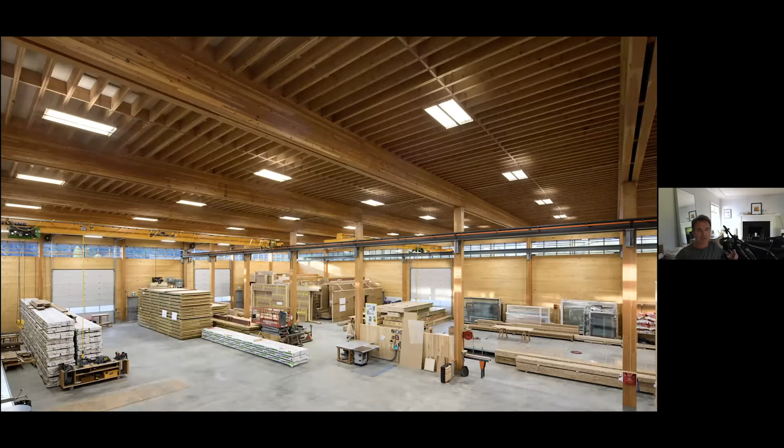So this is a good example of it. And then there's an office part at the front here and some work areas that were built to Passive House standard. What is interesting about this is, although we finished this building years ago, it is actually one of the suppliers for the exterior wall assemblies on PH1.

So you can get an idea, I don't know if you can see the mouse or not, but there's a series of insulated panels that they build here.

What's also interesting in the factory is that we're just doing an expansion of this now, so this needs to be updated, the photos. They've blown out this wall in the back and they've built another 18,000 square feet. So they're producing this at a fast and ferocious pace at the moment, can't seem to keep up.

Which is a nice kind of development in the sense that where they got their background in BC Passive House, I'm sure you've heard and talked about Matteo before, but it was coming out of the Winter Olympics with the Austria House being donated and then being assembled here. And then Matteo and his group got together and said, well, shouldn't we be doing this? So this is where the factory comes from.

And it's located in Pemberton, which is quite a beautiful thing. So we can talk about that one. But what was interesting is around the same time, we got a phone call from Christy and Tycho, I believe, who are here somewhere on the call. You can wave, and started talking about doing a commercial Passive House building in the city.

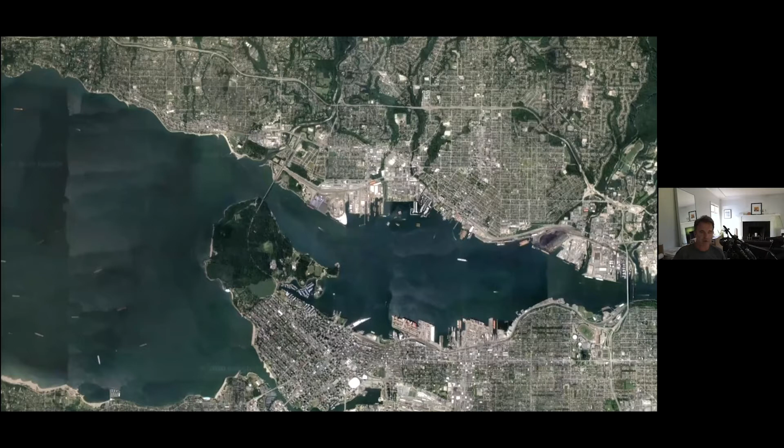So we all know where we are here. We're in North Vancouver, right down here at the end of Lonsdale. So the actual site address is 1 Lonsdale in Carrie Cates, right in front of the new Polygon Art Gallery. The art gallery wasn't built at the time that we started this. There's an existing restaurant, an Italian restaurant here, which is going to come back on the ground floor.

And so we were very intrigued with the idea of trying to do a passive mass timber project in a zero lot line urban environment. I had to write down everything that we were challenged with because we knew it was going to be hard, but I don't think we knew what we were getting into.

So it's Passive House certified commercial with a full Italian restaurant in it, meaning it's not induction, they're actually using gas. So there's lots of questions about that with Andrew and working with the Institute to find a solution for that. It's a challenging urban infill site, zero lot line on the back north wall.

We were going to prefab the building right from the beginning. We had to come up with 3 mass timber alternate solutions to get the project through code. One being the ground floor being an assembly space, as the code was at the time, it had to be non-combustible construction. Then the partition of the party wall between the 2 properties, zero lot line, we were going to do it out of mass timber.

Which Joe will show you some of the miracle of it actually working, because to be honest, as we were going through the design, nobody really knew how to do it. So there was an insulated mass timber wall that had to be prefabbed and dropped in. And then the code was also wanting that wall to be non-combustible construction, so we had to go through that whole process as well.

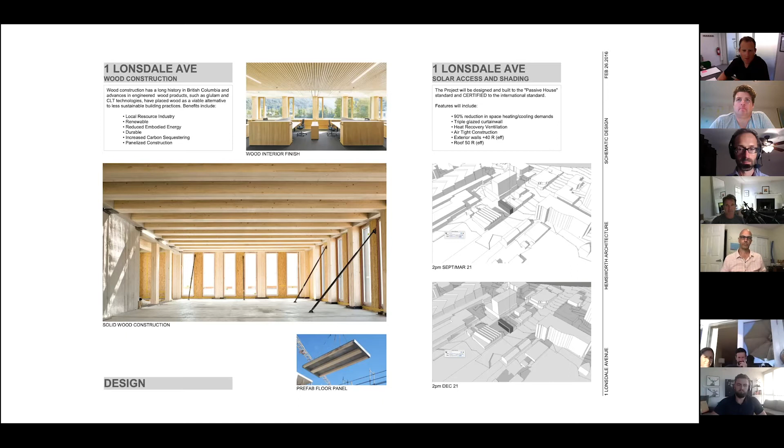And again, we were looking at prefab systems from the beginning.

Early on, we were interested in the massing change between what we thought would be the new Polygon and how this street became a more important part of the city - instead of being the low level it was, it's all going to be built up. So we did some preliminary massings. You can see early on we weren't sure about the height of the building - we were going to try to sneak another floor into it. This whole project was a balance between ambition and the realities of getting it through the city.

Passive House is part of that, as is the mass timber, but they were almost like the known knowns or known unknowns, whereas we got into some development issues - not with the city necessarily, but just inevitably for doing a high profile site like this that you're going to have to deal with.

We were looking at using something similar to the Passive House walls developed by BC Passive House, where they're building their walls with OSB on the inside, which is taped, blown insulation, and then the Agepan on the outside, with an interior wall on the inside which has been used for most of their servicing.

So the building then settled into the idea that we didn't want to go into another rezoning. We were stuck with roughly 2.6 FSR, 93% site coverage, and a maximum height of 11.9 meters. So we had to fit everything within that.

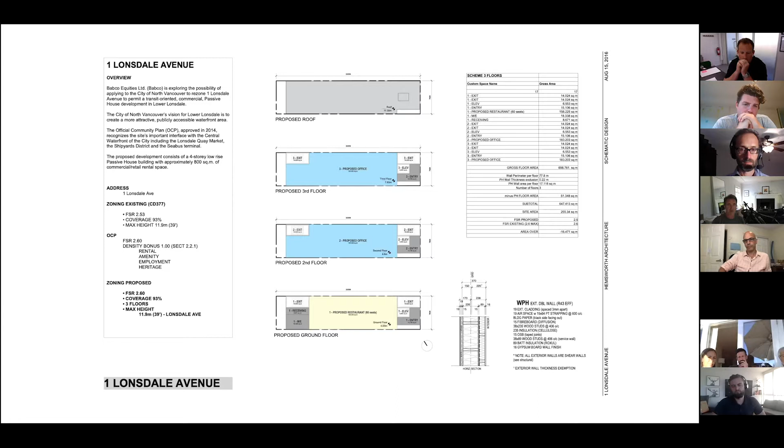One of the things we were clear about at the beginning was that we knew there would be these peekaboo views and throughout towards the city, depending on where you were in the building. We try to take advantage of that.

So then we started kind of going back and forth. One problem with having a lot of time to deal with a project is you have a lot of time to change your mind and make decisions and go back and forth. Over the years, we started this one probably at least 5 years ago.

I think it was to look at a palette that we could connect with more, and that the client would also feel comfortable with. So we started looking at using a kind of glazed brick as something heavier and more grounded, also playing off the lightness and the floating volume of the polygon across the street.

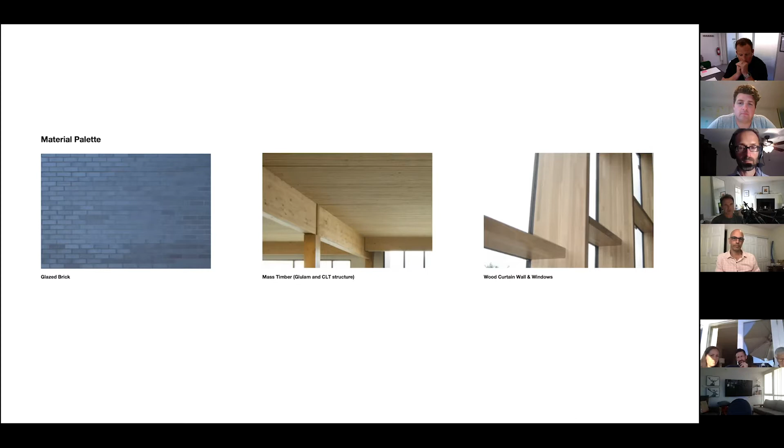So we wanted to do that, wanted to play off the ideas of an existing warehouse, that kind of warehouse construction along the waterfront. So we want to expose the glulam and the CLT, and ground it in this kind of almost existing building, but with a little bit more brains to it as far as its systems, and a little bit of interpretation architecturally.

So there is still work going on with the city as it relates to the edge condition here. Originally the road was much wider, so now we're looking at bringing the road across, which is helping us with the floodplain. There's going to be restrictions, hopefully, about cars or buses along Carrie Cates, where it becomes more of this pedestrian mews.

We set back the entry here, an elevator as you come in to split the occupancies from the 2 offices above and the restaurant below, and then just 2 exits dumbbelled on either end, but a very tight site and right up against an existing building, which you'll see in some of the videos.

So again, on the ground floor, we have this lobby space, shared entry, the restaurant itself all facing out towards this public space. It's not shown here, but the restaurant's kitchen and bar are actually back up against the wall, so everything is kind of falling out into Carrie Cates. And then basically just the floors are mimicked above.

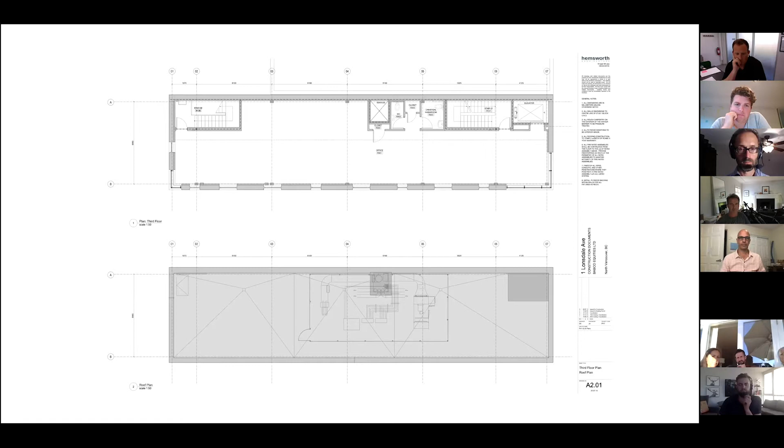The 25-foot site width is a challenge on a lot of different fronts, but we tried to look at different options to break these up into individual offices that could be rented. Right now it's probably going to be per floor, just based on trying to get your circulation levels down, and then mimicked on the same floor, on the third floor, which would be a great place for an apartment if you could pull it off.

So then what we're looking at here is basically our building sections. What we've done is an insulated slab. What you'll also notice, as I mentioned, there's no parking underneath the building, which is a whole story unto itself to get that approved.

It's a glulam frame structure with CLT floors and roof, and then all the wall panels on the 3 open sides were coming from the factory in Pemberton. The glazing, as all accounts, is coming from Austria I believe, and would have been installed as the panels were going, before the panels were installed, but I believe it's all stuck in a container in a strike in Montreal.

And then what is unique about the project, again, is this fascinating back wall. The wall itself is CLT, stacked up against the frame. They were pre-insulated and then clad so that we could slide them in behind the building. They're also working as seismic lateral support.

It seems simple now that it's built, but it's been a challenge, and full credit to Joe and his team for coming up with a method that worked here, because it's one thing to draw it, another thing to build it, as we all know.

And then just a screen grab of, besides doing this, we're doing our own internal coordination models with the mechanical, electrical, structural, the prefab. That's also going now to, I think Joe did his own coordination model. And then the big model started with Structurlam, where they're doing all of their CLTs and glulam. And then all the panels were coming from Dürfeld, BC Passive House, and the glazing coming from Austria.

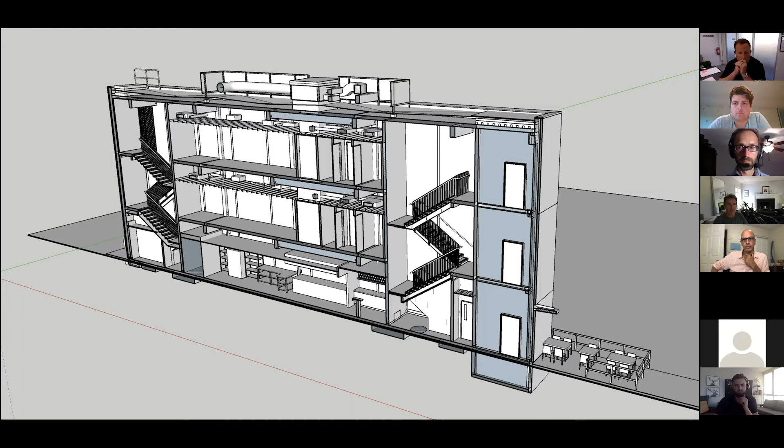So the building is really never site measured. It's coming off the digital model, which has been, well, I'll let Joe talk about putting it together. So this is just some quick ideas from the ground floor here of the insulated slab, lifting it up to get it above the floodplain. The beginning of the structure going in here, and I'm not going to steal Joe's thunder too much on this.

This is the mystery magical wall that slides in and creates the necessary fire rating between the buildings, also performs in passive house. Andrew can talk about all the challenges we had on that front, especially with the ground floor being a restaurant. And then there's the question of how do you seal these as they're being dropped in behind both a new building we're building and an existing building in the back.

And this was the last panel going up a couple of weeks ago, I think. So start to finish, it's 8 days, sometimes 9 days of construction from the ground up, but I'm sure Joe can correct me if I'm wrong on that. And that's it - that's our quick story about the project.

It's funny to present a project that's not finished for us yet because it's kind of in process, but I appreciate the interest - I'm sure there's going to be lots of questions. Do you want to wait, Chris, and ask the questions later, or as we go, or all together at the end? We're at 6:30. What if someone's got a couple of quick questions?

There's nothing that came up on the chat, but if anyone wanted to ask a question now for John specifically, if there's something that pops up - going once. Oh, that's great, I got it perfect. I do get a quick question - sorry. Was the original prefab looking at the Cree system versus local stuff?

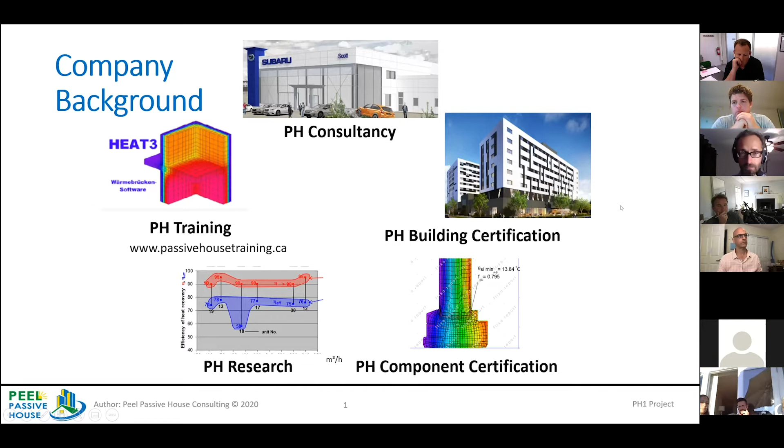So interesting, speaking about passive house, normally I have way too much to share on a given project - I could speak generally for a couple hours or more. This one was actually more straightforward from a passive house perspective. We'll get into the commercial kitchen side of things, that's probably the most challenging and interesting aspect. From your passive house envelope perspective, from a design perspective, it's actually rather straightforward.

I think Joe will be talking much more about the construction challenges and process, so there'll be more interesting stuff from that end to speak about. But the envelope is straightforward - mass timber, so we've got our CLT wall that John mentioned at the back wall, a simple CLT panel with a self-adhered membrane for air tightness and then exterior insulation. We also have the main wall, which is the BC passive house system, a stud-based system, and the roof as well, also a CLT panel with exterior insulation.

And then also referenced was the floating slab, so we've got a nice near continuous layer of insulation around the building. Even on the air tightness, we mentioned self-adhering membrane on both the wall and the roof. The stud wall had OSB that was taped, standard membrane into the floor. The only additional challenge was the elevator shaft vent - we needed a vent in the elevator shaft, so we needed to make sure that was sealed up with an airtight damper that would activate as required to vent the elevator shaft where needed.

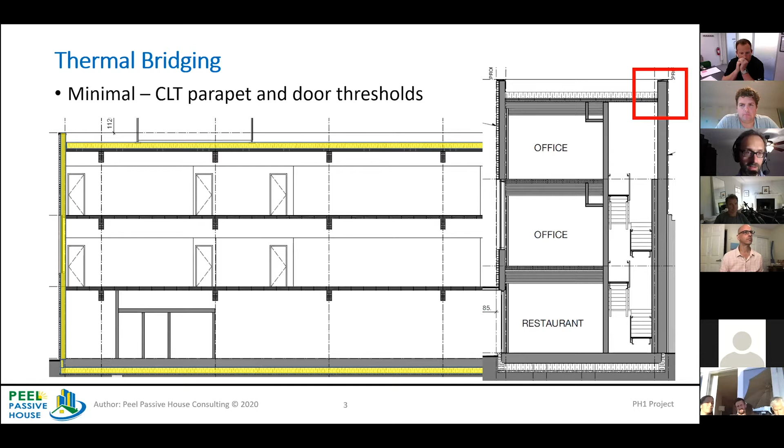Yeah, that's pretty straightforward. The actual thermal bridging is minimized. It's basically a continuous blanket of insulation, except for a couple key areas like the CLT parapet, as well as door thresholds—those tend to be difficult to get thermal bridge free. But because of the nice simple box shape, this is really a near ideal shape, almost a full box for a passive house, which makes the design detailing pretty straightforward. So there's actually not too much to discuss on that.

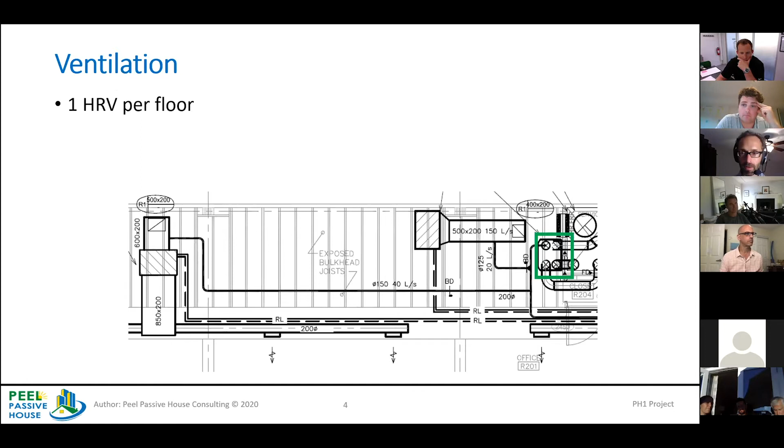Switching over to the M&E side of things, on the ventilation—so your space ventilation—we do have one HRV per floor located on each floor. So one in each office space, and then one down in the restaurant. I'll talk more about how the restaurant's ventilated.

One thing that's a common approach in standard mechanical design, and we see this often in passive house—I like to bring this point up because it's a point where projects can improve the efficiency or optimize the design a bit better. So typically what you see is you have an HRV, and a lot of passive houses are going with heat pump based systems. In this case, we have a VRF system, so a refrigerant based system, and it's ducted. So we've got our indoor unit here, and the outdoor units are on the roof, and then what we do is duct the heated and cooled air into the space.

There's actually two or three fan coil units per floor, and we basically circulate air into the space, heated or cooled, and then return the air back to the unit and reheat it or recool it and put it back in. What's commonly done is for the ventilation supply air to be ducted into the fan coil unit, either directly into the return air or sometimes into the space where the return air is taken from. So if you have a mechanical room, the return air might just be taking air from the mechanical space, so the supply air might be dumped in there.

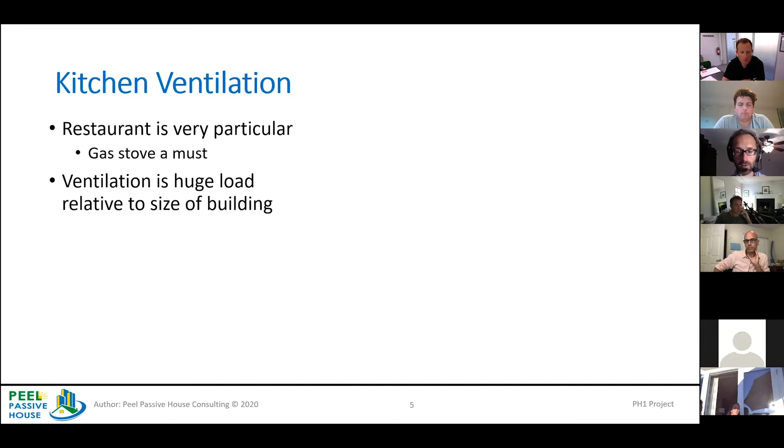You can see what would be required based on the occupancy is around here, about 600 CFM or so. The kitchen exhaust by itself is over 4 times that, so it puts a huge extra load on the building. The commercial kitchens we've worked with in the past have always been in much bigger buildings, so they still have an impact overall, but relative to the size of the building it's noticeably less. Because this is only a 3-story building, this restaurant is quite impactful.

So in order to reduce the energy required to supply this amount of exhaust, first off we introduced demand control ventilation. This is essentially where you're varying the rate of the exhaust based on actual conditions. There are a couple of different methods—you can control it based on time, or you can control it based on heat and/or smoke and pollutants like that.

This hasn't been fully designed yet, the kitchen—that's going to be in the future. But our basis was to control based on detection of heat and smoke, and we estimated with a kitchen consultant what the rate would likely be throughout the day. For about 9 hours per day we'd be running at full rate, about 2,800 CFM. For 5 hours we could reduce down by 25%, and for the remaining 3 hours, of 17 hours total operation, we'd be at 60%. So the effective overall average rate is lower than 100%.

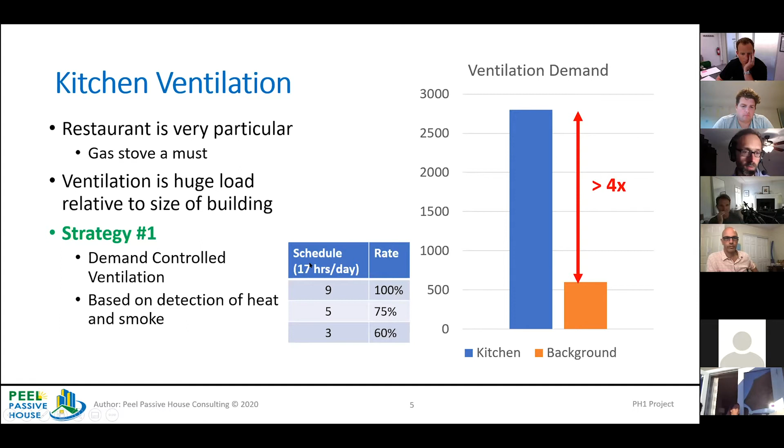Our second strategy was to use displacement ventilation. Normally with a kitchen, what you do is have exhaust air, and then you need to make up that air, especially because we're in an airtight envelope. But even without the airtight envelope, because of the volume of air, you would need dedicated makeup air—essentially fresh air that helps offset the exhaust air. Normally you would do that directly into the kitchen, and separately provide ventilation air to the seating area.

This would have been done with a regular ERV, just like we have with the offices. We have occupied space, we bring in fresh air through the ERV, recover and exhaust the stale air, and recover the heat between the two air streams. So we preheat this air quite a bit. But these would be treated independently.

For this project, instead of having an extra ERV where we put fresh air separately into the restaurant space, what we did was not send the makeup air directly to the kitchen, but send it into the seating area instead. So we don't put it through an ERV anymore—we put it through the makeup air unit that was going to serve the kitchen directly. We direct that air first through the restaurant area, and then it passes into the kitchen and gets exhausted. We still have the same amount of air going through—we have to exhaust it and match it with the same amount—but we avoid the extra ERV in doing so.

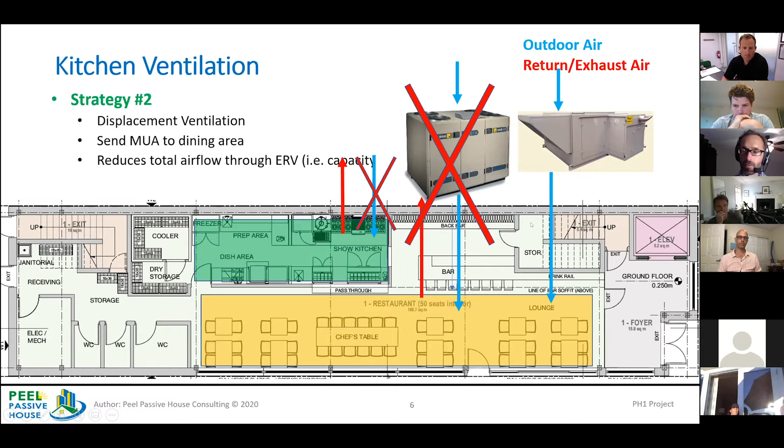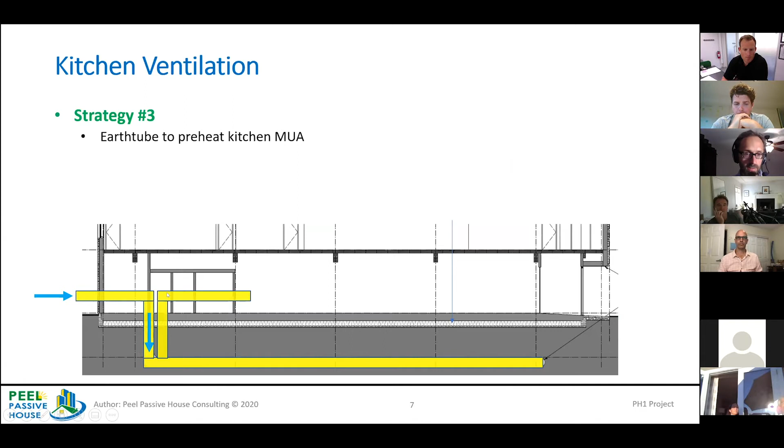Instead of having to heat it from outdoor air, why not bring it through an earth tube to preheat it up, potentially up to the ground temperature. So we designed a system that would take in the fresh air, go through the tube, and all the way back into the building.

What we realized in doing some detailed analysis is that we don't want the air to go into the tube in the ground all year round. We actually need to regulate the temperature because you can end up cooling down air when you don't want to.

I've got a little graph that shows this. So what we did was add a damper which controls where the air flows, whether it goes into the earth tube and then into the building, or directly into the building.

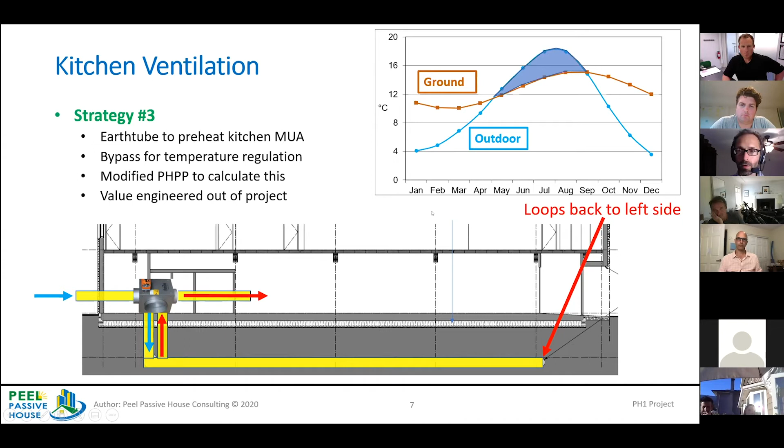For a bit of insight into the energy balance, I wanted to speak about the south orientation, because this is an ideally located site from a solar access perspective, so we could get a good amount of solar gain. If we look at the heat supplied to the building, a lot of it comes from solar gain, and we don't have that much loss. So the gains are much greater than the loss because almost all of the glazing is south facing.

But the problem is that when you have such an abundance of solar gain, and this building's not overglazed, you've seen the renderings, when you have all that solar gain and a good amount of occupancy—like with the restaurant patrons coming, or the office staff—you end up not being able to use a lot of those solar gains. You've got a lot of solar gain available, but there are good periods of the year where you're at your comfortable room temperature, 20, 21 degrees, and then the sun starts shining and you're pumping more solar gain into the building, and you don't need it to be higher than 21, 22, but the temperature keeps rising because of that extra solar gain. So that's what is meant by not useful—it's not offsetting your heating demand in those cases. That's definitely something to be aware of when designing with solar gain in mind.

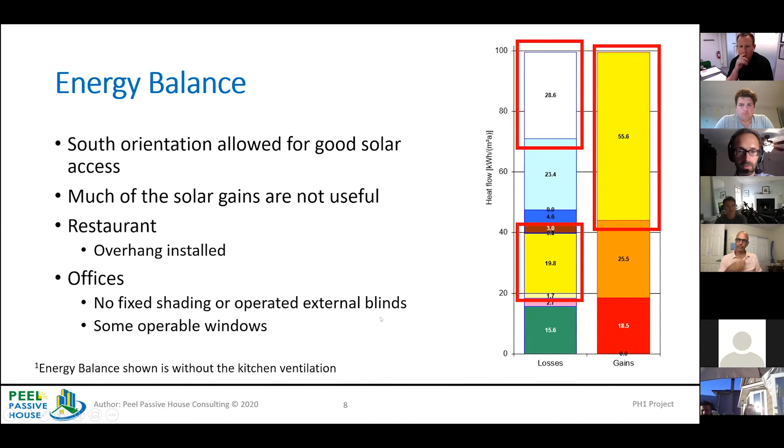In terms of controlling solar gain in the summer, at the restaurant level there's a nice overhang. For the offices, there are no fixed shading elements, and operable external blinds weren't an option for cost reasons, so there are a few operable windows for natural ventilation. Just to note, this energy balance is without the kitchen ventilation, which gets a bit skewed with it included. For heating and cooling, we've got a ducted VRF system, and for hot water, the biggest load is the kitchen, since there are quite a few patrons per day—a good amount of water demand relative to the size of the building.

We did explore the Sanden CO2 heat pump, but that doesn't have enough recovery. That means in order to meet the ongoing demand of the kitchen, the heat pump can't recover and produce enough heat in enough time. It can produce heat very efficiently, but with big continuous draws or frequent heavy draws, the heat pump just doesn't have the power, the fast acting heat generation that a standard gas boiler does. So it just wasn't adequate from a performance perspective. There's a natural gas tank there, and the offices have small local electric resistance tanks, one per floor.

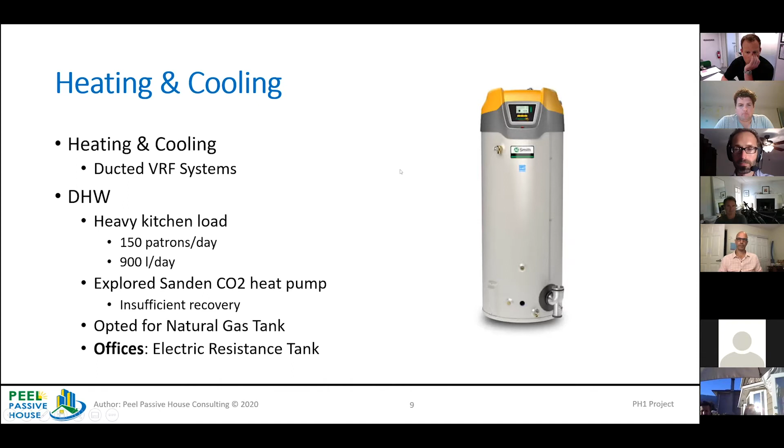And that's it for Passive House.

I think we had a few questions off the bat there for Andrew. I know Scott, you of course have a couple. Why don't you unmute and ask them yourself?

Well Andrew, this is an intriguing project. The one thing I was wondering about, when you bring in that makeup air, how are you heating it? You can preheat it, but then how are you putting the extra heat into it?

That's a standard makeup air unit, which now is located on the roof because originally we were going to do it on the ground floor to connect it properly with the earth tube. But because that earth tube's no longer there, the makeup air is coming basically from above and being heated with a makeup air unit on the roof.

So it's a gas-fired makeup air as well? Yeah. Oh, too bad. Yeah.

And I'd love to have seen the earth tube in action. Well, even the earth tube, I didn't think would get it warm enough. It was designed to get it basically to maximum output, which gets it to ground temperature, which is pretty good. Ground temperature is between, it drops to about 10 degrees up to about 15 degrees maybe. So it definitely does have an impact, it's just the cost to energy savings is harder to justify.

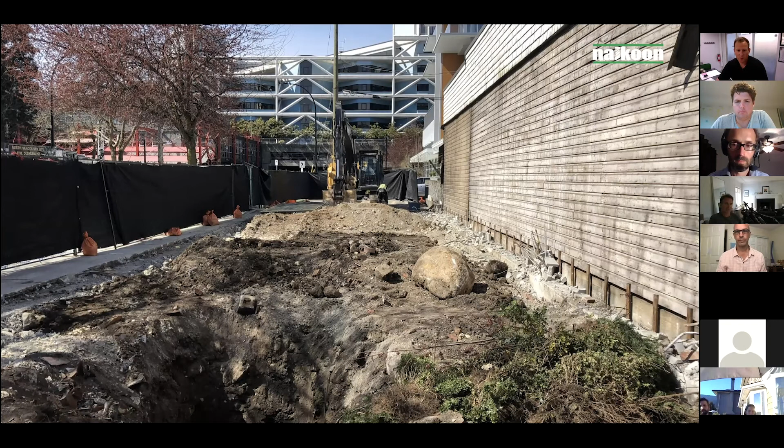So that's really the site that we're working with once the building came down. We got pretty lucky in that the neighboring building had a reasonable foundation, which was one of the major risks we identified early, before we tore that down. And so that was good. There was also a retaining wall on the property line that ended up helping us as we went through the excavation process. One of the requirements we identified earlier was that we're going to need some staging area.

This was quite a bit of material and prefabrication work. It certainly was not going to happen on the site, with just-in-time delivery of goods coming right out of the factories. Structurlam provided the building, and BC Passive House provided the exterior panel components. Just wasn't going to work - too risky, very limited site space, traffic closures, and we wanted to avoid any on-site hiccup risks in the assembly.

So we were fortunate to find a space about a 5-minute drive away from the site. We had 2 acres there, which allowed us to receive and land all of the goods weeks prior to installation. That let us really get an understanding of whether everything was going to fit together.

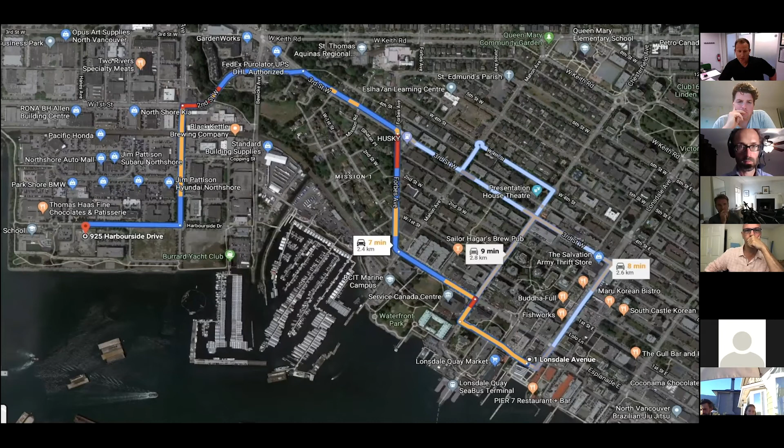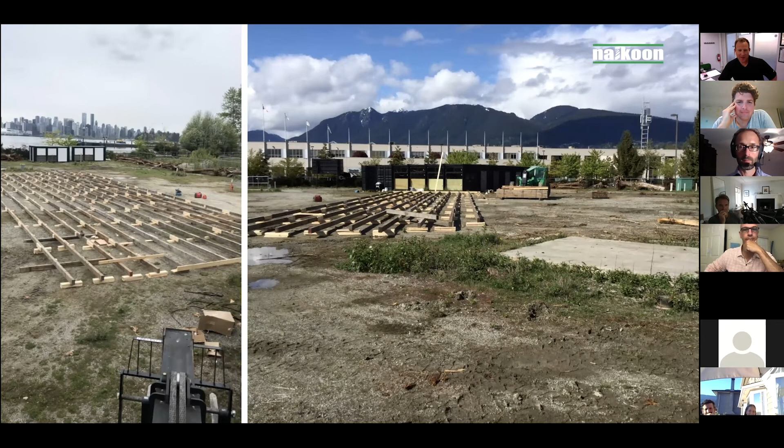Just trying to capture some sense of the magnitude of the material. When it all arrived into the yard, it was kind of unbelievable to look at and understand how that was going to fit on that little 25-foot site, but it's all there now.

Just jumping back to the site a little bit, to put some context into the number of things going on in parallel - we were excavating the site and working through the foundation, as well as prefabricating all the components and getting them ready for installation down at the yard. There were a few delays with the city permit in the beginning, so we had to get innovative on getting things moving and breaking sequence in some senses. I'll show you shortly, but running some stuff in parallel, which was all very successful.

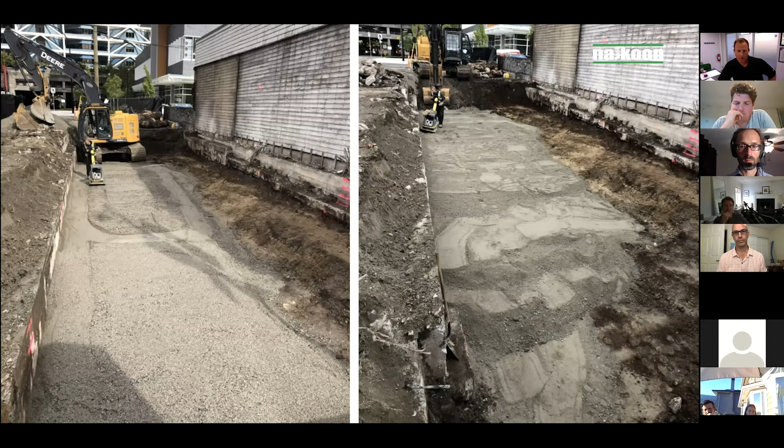This is just a shot - we had to dig down about 6 feet of loose silty ground, and then build it back up with compacted road base. Just a few shots of the site there.

We prefabbed all the stairs for the project as well during that time - there are three flights of stairs on each side. Those were all done using a digital model to make sure we were going to get all these components right. We bolted this model into the master 3D model in CAD, which had the Structurlam components, all the steel, all the BC Passive House components, and then our structural components. That was very effective, and everything did fit quite nicely.

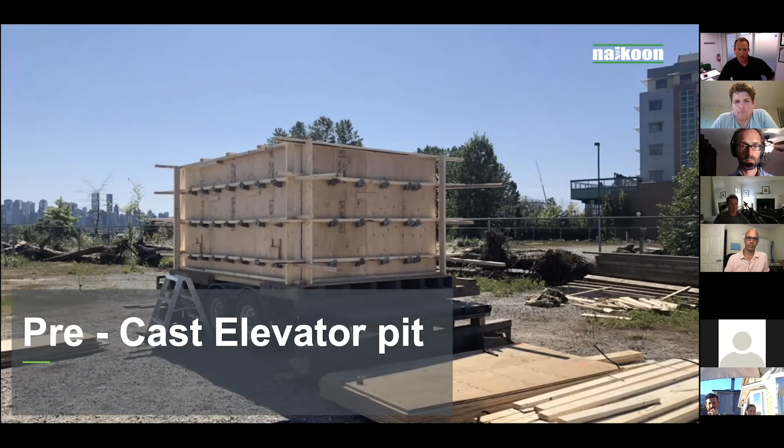The other thing we did, which was not part of the original plan, was the elevator pit - really the only subterranean chunk of the foundation, which goes down about 5 feet. So we opted, again trying to save some schedule time, to precast this in our yard. And that worked out quite well - we precast that.

We got approvals from the structural engineer and were able to just drop that in. That saved about 5 to 6 days of sequencing on site, like forming, bar, pouring, stripping, and waterproofing. We dropped it in within an afternoon and continued the build, saving shotcrete and other work. That was quite a win from outside-the-box thinking by the construction guys.

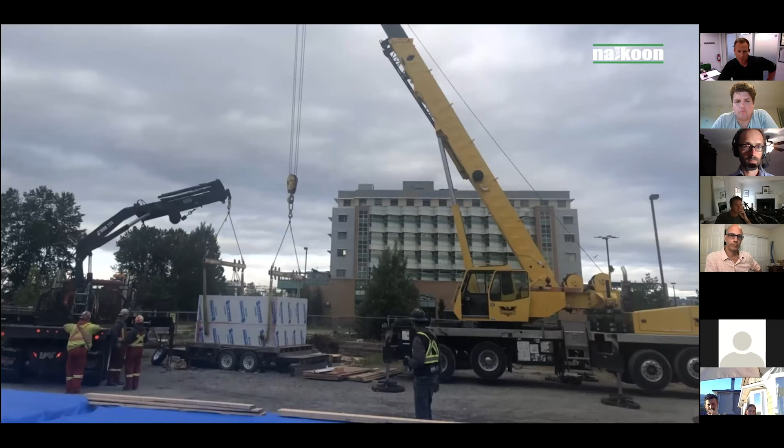So that was the elevator pit getting dropped into place. We were able to backfill that right away and begin with the foam.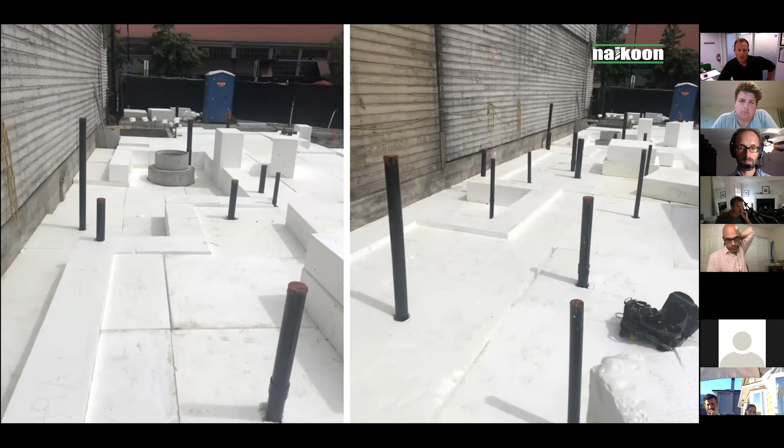Here are some shots of the under-slab insulation and the number of penetrations through it. It took a bit of time drilling those holes out, then we had to spray foam all of these pipes prior to installing our air barrier.

You can see the shape of the slab thickenings built right into the foam, so there was limited formwork on the insides, just the slab edges. We were able to form a curb right in and pour everything monolithically.

This is the air barrier, a Stego 15-mil air and vapor barrier, taped. Everything was fully taped and sealed to the pipes, and wrapped up the sides and perimeters to tie into the air barrier at a number of different conditions around the perimeter.

One of our biggest concerns with this building was air tightness. From what we know about building tight structures, an interrupted or non-continuous air barrier is your enemy. This air barrier's continuity breaks probably 30 times throughout the course of this building, so that was one of the biggest challenges we discussed and developed strategies for early.

It was really key to use our model and come up with air barrier strategies we're comfortable with. We're not at a point where we can test the building yet, but we feel quite confident we'll achieve the air tightness and air change requirements.

Knock on wood. Just some shots of the poly coming up the forms with spray foam, and then all of our in-slab services coming into play.

And rebar, of course, having to have trade meetings early with all of the trades to make sure they're not dragging rebar and cutting through our air barrier, and making sure they understand what we're trying to do here. That all went very well.

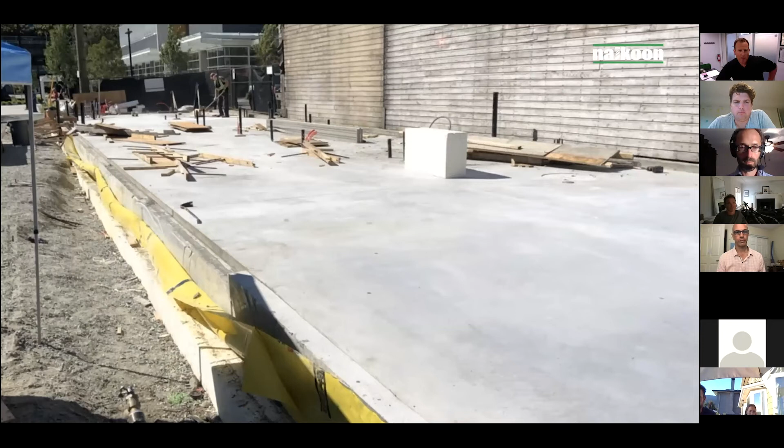Then we poured the concrete. It was about a 9-week process from the beginning of excavation to the completion of the foundation, and it went quite quickly.

And then I'm just going to see if I can play you a little 30-second video here. Let me try this. Let's see here. So I'll recap that. There we go. There's that whole process up to that point in 30 seconds.

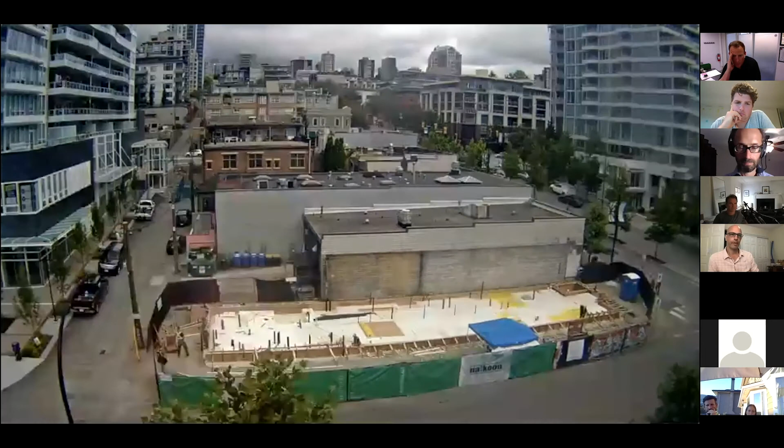We had a video camera on the Polygon Gallery across the street, so we got a lot of time-lapse footage: digging the hole, building this back up, and then the services going in, the underslab insulation over a couple of days, then air barrier, bar, and pouring the foundation. So that was 9 weeks in 30 seconds.

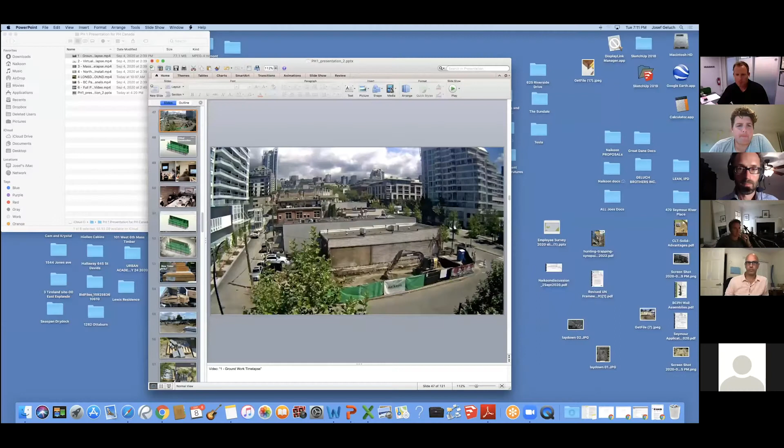Okay, let me get back into this. I'm going to jump around a little bit because I've got a few videos. So anyways, there's the logistics stuff. Now, oops. All right, I want this. I knew this was going to be fun trying to jump back and forth here. So, what am I doing wrong here? There, we're back. Oh, great, yeah, wonderful. So where were we? Sorry, team.

Okay, so we'll talk a little bit about the virtual construction process. We modeled the whole building from the construction end of things, and that proved to be quite beneficial. We've been doing that with all of our projects for the last couple of years.

We were able to get together as a group, including the crane guy, the construction team, and other key stakeholders. From the beginning, one of the challenges, as John was talking about too, was that north wall—it's a 34-foot tall wall.

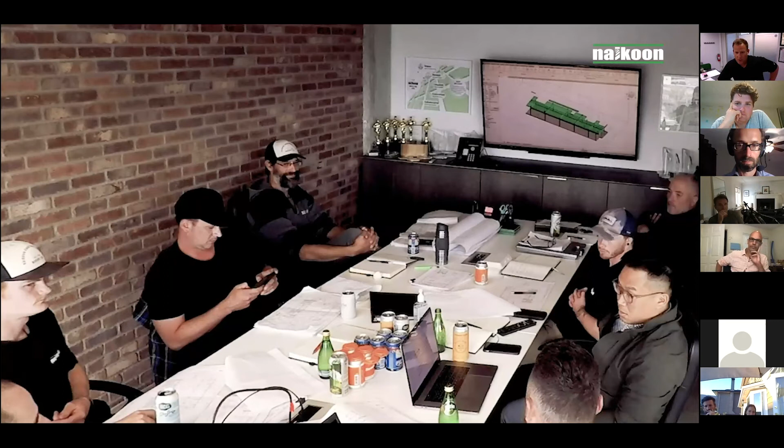The original sequencing had the wall going in first, then building the structure inside of that. Through this process, which we went through 3 times, virtually constructing the building piece by piece, we ended up coming up with a different sequencing, so it was very effective—a big win. We had originally projected a 21-day assembly at the outset, brought that down to 13 after the first meeting, down to 11 at the end of the third, and it was actually executed in 9.

I can just show you that sequence as well, here in a short video. So, yeah, here it is.

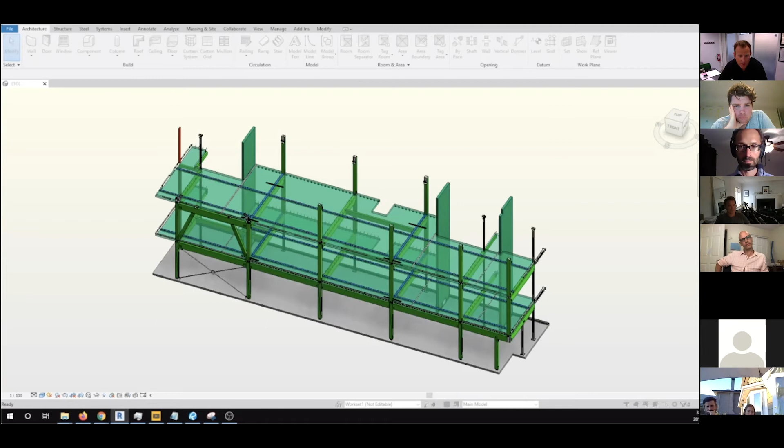This is a model we built out in collaboration with Structurlam and BC Passive House. We had everything in there—screws, all the hardware, all the steel components. There's actually quite a bit of pretty tricky steel connectors and details in this building; I'll show you some photos of those after this. We were able to use this model for a lot of our logistics planning—the crane swing and crane sizing, the sequencing of the actual panels, the assembly, and the just-in-time delivery schedule of the structure. It was instrumental in the success of putting this building up in such a quick time with really limited issues. There were some very minor issues on site during installation, but largely inconsequential, and we gained days instead of losing them.

That's the objective—the crane, the 8-man crew, and the daily burn on site of having that crane there is what we're trying to save, and it was largely successful in that regard. So it was a good process.

Geez, that's gonna do that to me every time, is it? I wish I was as good as you on these, Chris, but I'm just practicing.

So we got through there, and we were able to superimpose that model into the site and use that for planning and other things—traffic control, traffic management—so it was very, very successful.

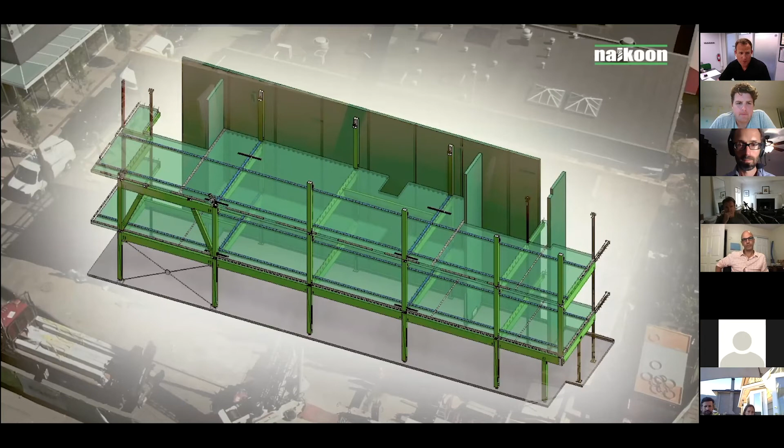We'll go through some of the details of construction. Structurlam supplied the structure of the building, a number of components. We received these about 3 weeks prior to installation, so we were able to lay out all the components in the yard, inventory them, and ensure everything was going to fit. We were able to dry fit all the components prior to them being required on site, and we did have a number of issues that were resolved, so it was certainly worth the effort.

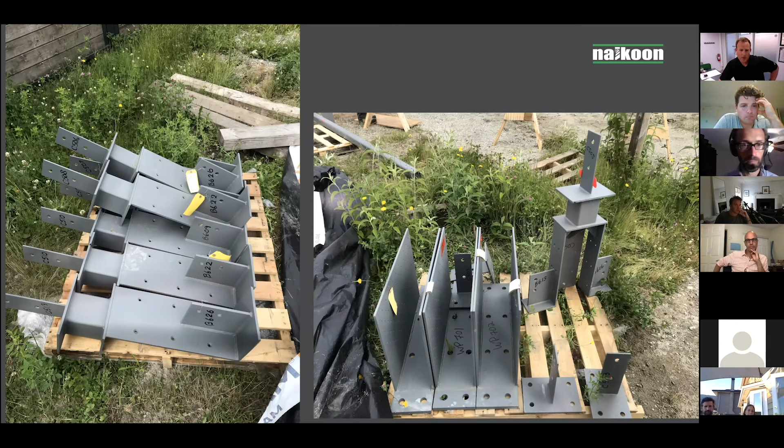This shot gives you an understanding—some of these connectors were quite complicated. You can imagine the number of members that touch a connector like that, and the tolerances involved. So we certainly felt more comfortable dry fitting all of these in the yard. Just some more shots of the different structural components that connect this building together—you can see the detail and the number of cuts, holes, dados, and everything in just one post base. We certainly had our work cut out for us to make all of these assemblies go well.

Whatever we could bolt together in the yard, we did, and brought that to site partially assembled, which added a lot of speed to how the building was erected. We had our crew really inventorying and understanding each component—there were 8 guys from our side who assembled the building and did all the prefab, and by the time the building was going in, they knew every piece and every part. It was a great process and well worth the time.

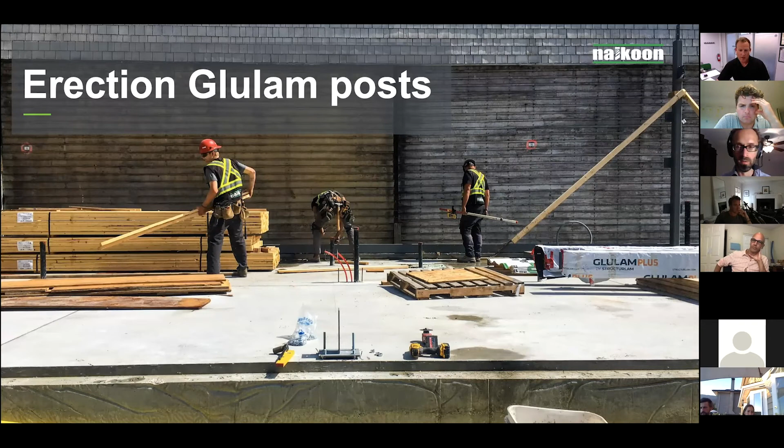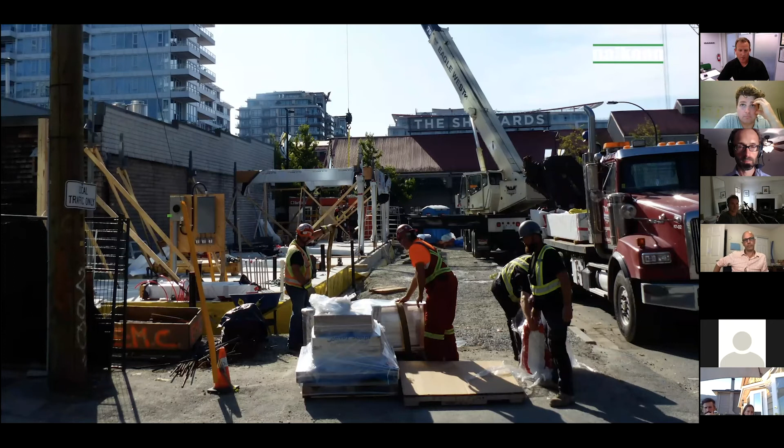Now getting to the actual sequencing—I'll run through some photos, and then I've got some videos that show the building going together. The first day of assembly was just all of the columns being stood, done by hand. The second day, the crane was mobilized and began putting in the main floor beams. We had a flat deck truck running between the laydown yard and the site, bringing the components just in time for the crane to install them, which worked out quite well being so close. A brace frame was installed on the ground and then lifted into place.

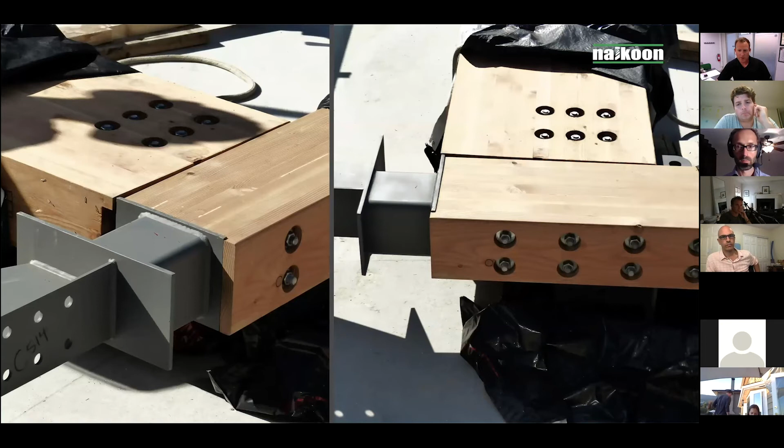Just a bunch more detail shots. So that was around lunch of the second day of assembly.

And then we started flying the CLT panels, which were 5-ply panels for the floor.

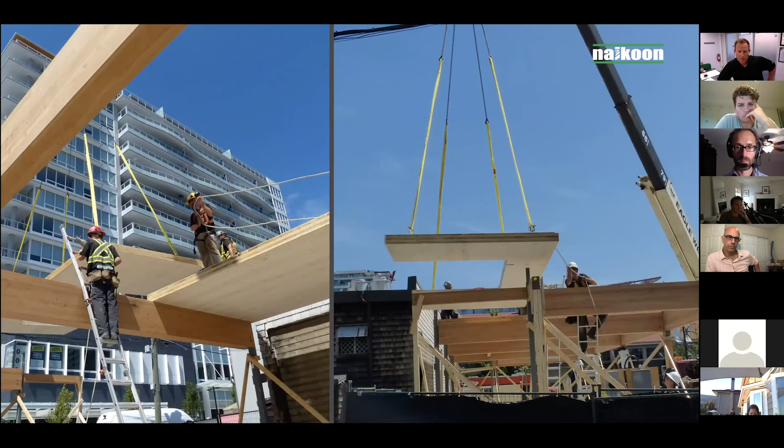Sort of the beginnings of day 3. Now you can see the frame starting to go up. All the stairs went in sequence with the building as well, so we were able to have safe access up and down as the install was going together.

This is the end of day 3. And then I'll try this again and play you a time lapse of that.

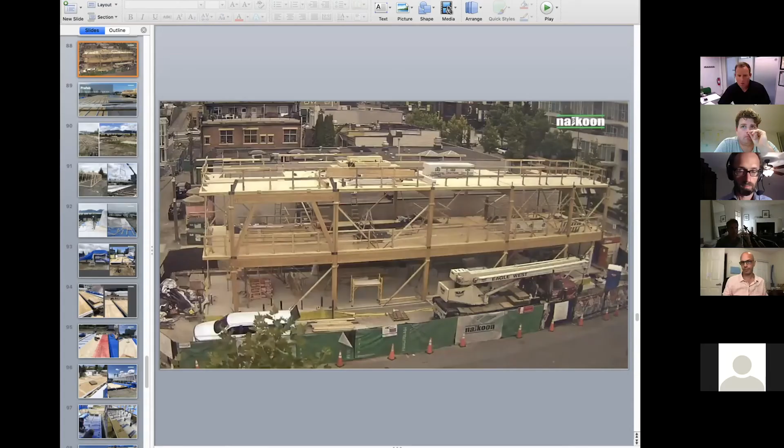So there is, yeah, here is 30 seconds of this. So that's sort of the first day. The columns are up and crane mobilizes.

So this is conclusion of day 1. All the guardrails are all prefabricated as well. And this is the conclusion of day 2.

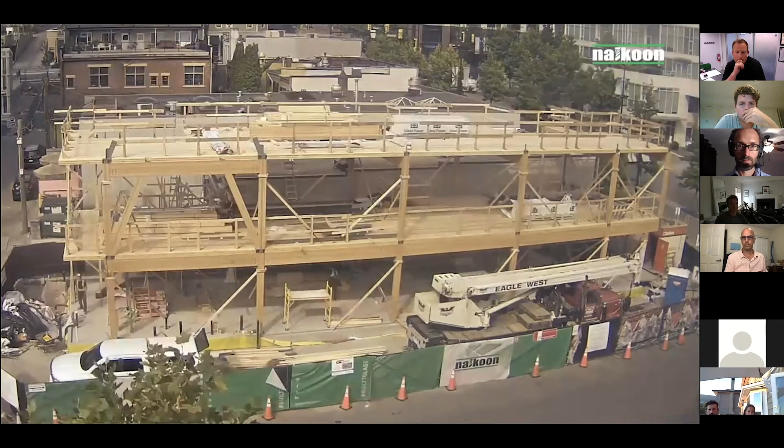Columns go up on that level. And then the next step is to install the infamous north wall. So you can see that that's not in it yet. And so we slipped this wall in between the 2 buildings.

And I'll just run through the sort of sequence of that as well for you.

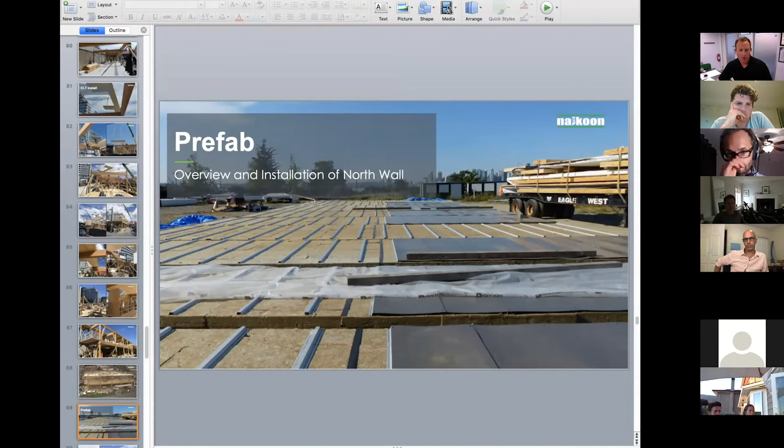So, yeah. All right. So, yeah, here we are. So the north wall, I'll just run through this. Geez. Sorry folks, that's somehow my unlucky day here on these. Because you're using a Mac. Yeah, is that what you think it is? No, yeah, I'm just blaming myself, I think here.

What if you, Joe, were to double click on the photo, like in that scroll menu on the left next time? Like if you double click on it, does it just start from there? I'll try that one. Yeah. There we go, I made it again. That'd be painful if we have to do it again, eh, Roberto?

But here we are, so yeah, I'll just run through this. It's quite an interesting sequence of the offsite construction.

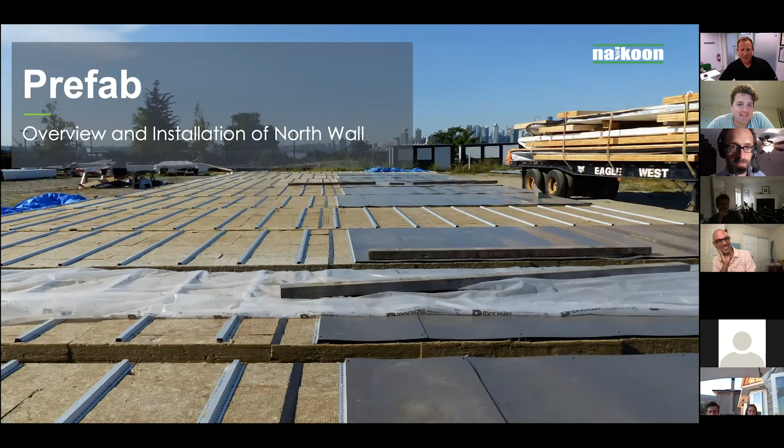So this is the yard that we mentioned. We laid a bunch of cribbing down to be able to essentially lay that north wall out in sequence and be able to prefabricate it.

So you can see the panels coming in here. We built a little hut that was able to be lifted onto each individual panel just to cover for weather. It's just larger than the width of these panels. These are about 34 feet tall and I think about 7 feet wide.

And so you can see them all laid out in sequence there, and that's sort of how the hut worked. So they just worked through one panel at a time and worked their way down. Significant amount of detailing on the edges for air tightness.

So this is a Siga tape which was wrapping out and into the inside of the building, because the panel is exposed on the inside, and we've got no way of getting to the outside to secure a continual air barrier. So there's quite a nifty detail that the design team came up with, which enabled us to bring the tapes in and tape the panel to maintain continuity of the air barrier on the interior of the building. And so that was quite tricky.

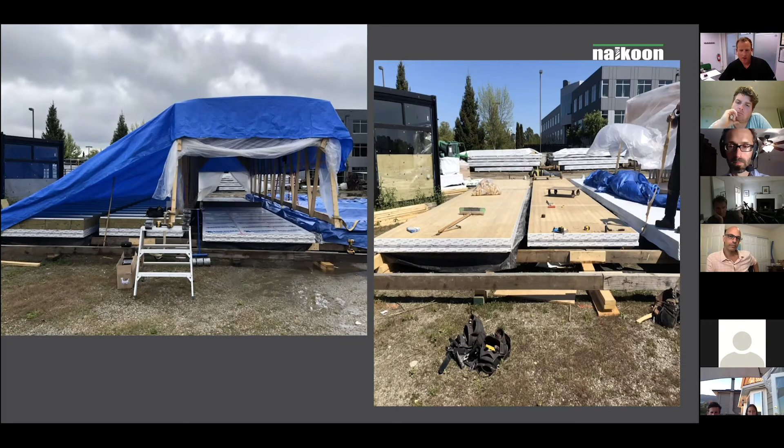This was the guys being innovative on saving their backs. So you have a couple of carpenters rolling around on their tummy here, installing tape on all these panels. This is with the inside face down.

Then there's a Soprema VP100 that went on the panels with a primer. They were using a 20-pound floor roller to roll those on. So it was quite quick, quite effective, and a huge win as far as you can imagine the difference between doing this on the ground versus vertically in place off of genie booms and other things. So it's very successful and equitable.

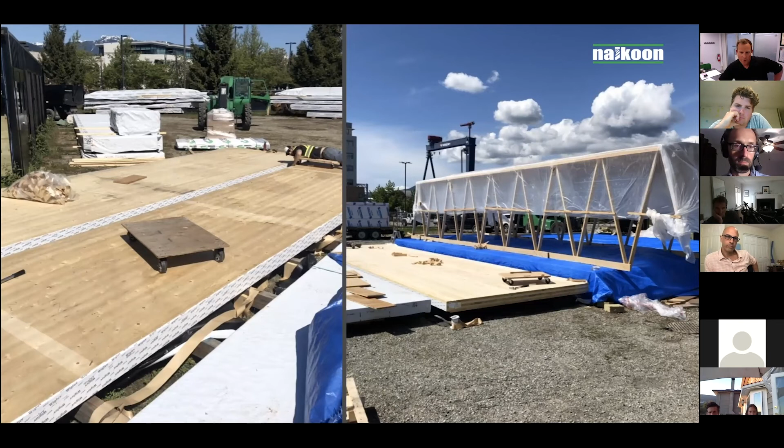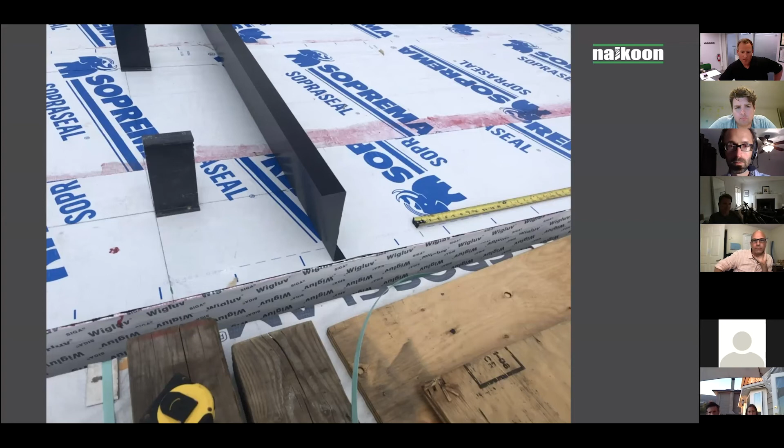Some more shots there. These are the Cascadia fiberglass clips and mineral wool insulation that went onto this wall. And so those were all applied again, super fast. You can see here, even through-wall flashings, this is sort of the break where the panel meets the adjacent building. We were able to put all the brake flashings and everything in place on the ground as well. So quite a bit of work and detailing went into these, but it all went very, very quick.

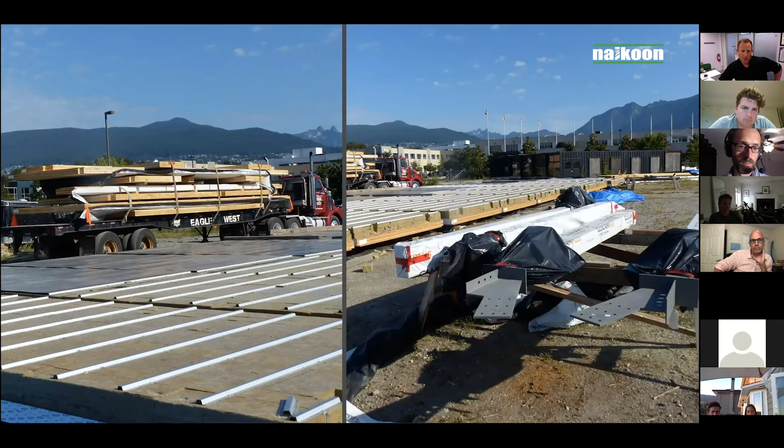Some more shots here of that process. We were lucky with weather. It did get wet for several days, but the tent worked. There's kind of a shot of that protected, and some of the panels being loaded up to head over to the site to be lifted in place.

That's the completion of the prefabrication of the north wall, and you can see all the components in the yard here being staged to be picked for installation. This is a metal panel that was installed as a protection layer adjacent to the building, so you wouldn't see it, but if that building ever came down, this installation would remain protected.

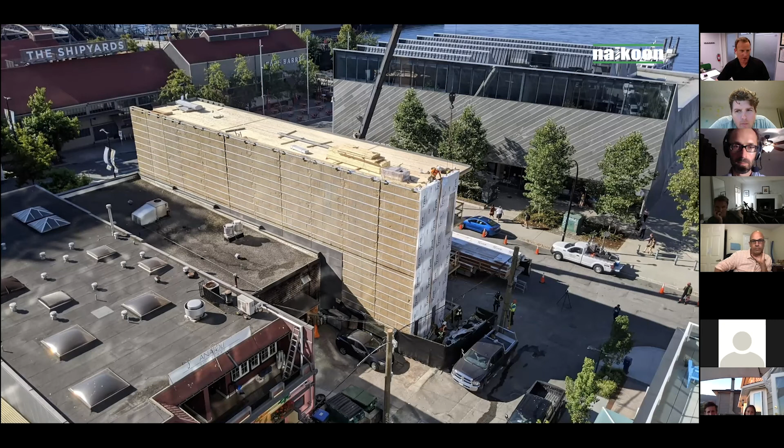That's the first lift, the panels flying into place. I got a video I'll show you of the installation of that north wall, and it was certainly not easy, very tricky. We had about an inch of play between the adjacent building and the structure we had just built, so it was a bit of a nail biter, but ultimately it got done in one day when we expected two, so it went very smooth. I'll play that now.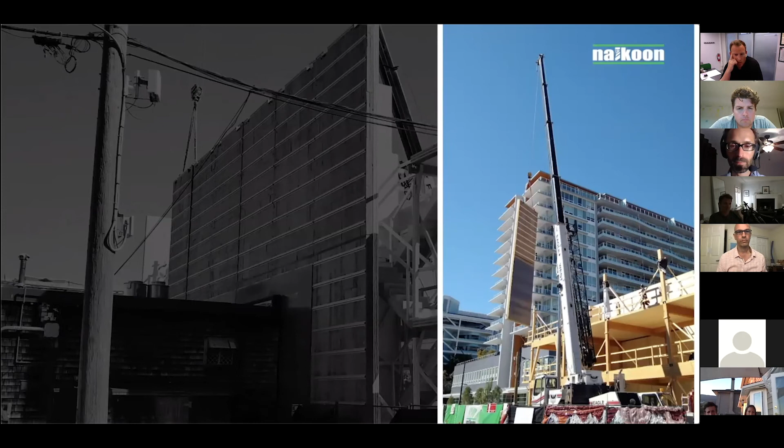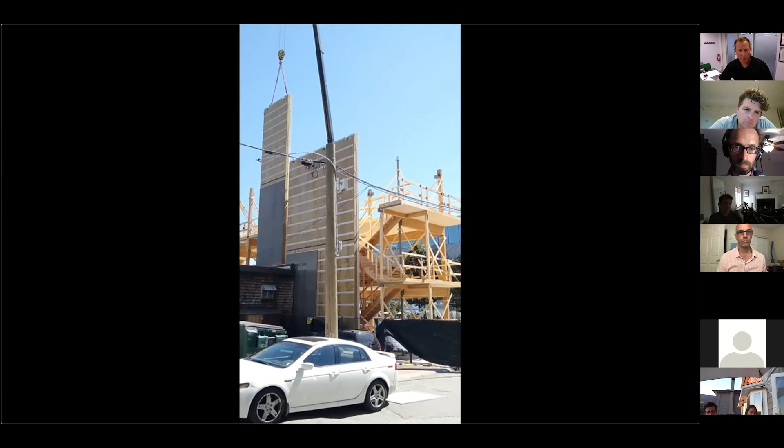You can see that panel being slipped down between the structures. This is the low side of the adjacent structure. Some areas are less than an inch to slip these in, but everything went quite smooth. We had beads of sealant between the base of the panel and the angle iron on the bottom, as well as panel to panel connections, for additional air tightness. Then we continued on sequencing the top floor, just some shots of the building as it went up.

That's where the model helped us out quite a bit.

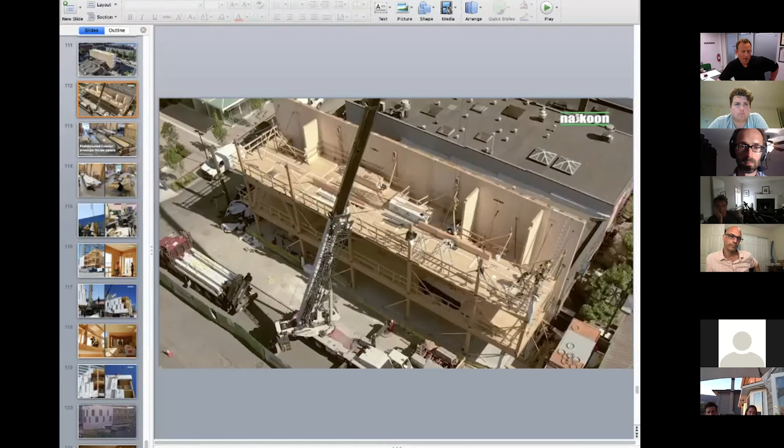Let's try Roberto's trick here of double clicking this thing, seeing if that'll let me share this screen. What do you think, is it gonna work, Roberto? Oh no, man, what an embarrassment, I'm going to say no. I think in the menu there's a 'start from the current slide' that would have helped. I'll get that one figured out for the next one, guys, I promise.

You get to see this stuff again. I'm almost done here, I'll just go through the final bit of construction, we don't get into anything, just the structure.

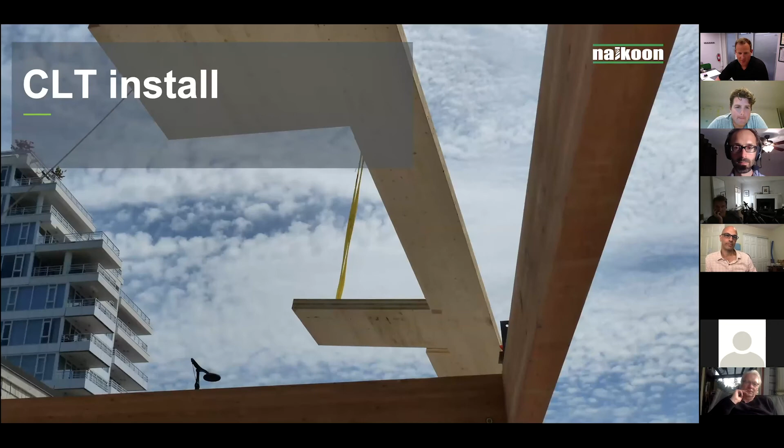So that was the north wall, and then the rest of the walls, south, east, and west, were built up in the factory in Pemberton, BC Passive House factory. Some shots of these walls being constructed, fully insulated, wrapped using Tyvek, and sent down on two loads, installed over the course of two days.

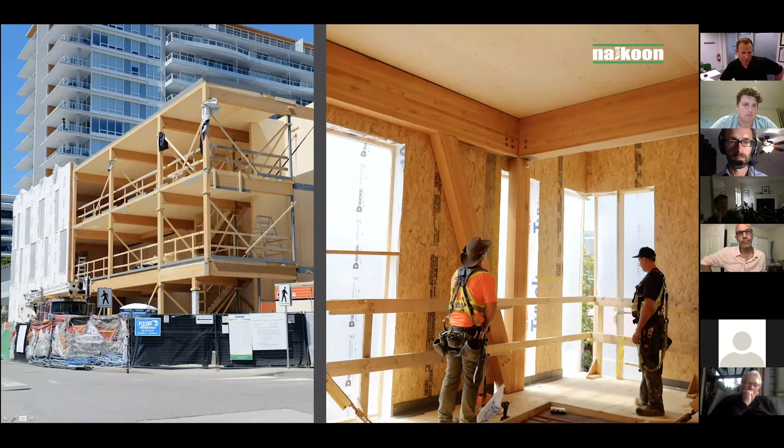That's the conclusion of day one. You can see all the angle iron bolted to the CLT floor plate. Those are pre-bolted down onto the plates, and then the panels are fastened with GRK screws from the back. Worked quite well, went together very, very good.

Just a shot on the inside showing this brace bay and the panel installed. Those panels were taped on the inside, so we'll utilize those as a secondary or backup air barrier. I think we'll be okay. Some more shots of those going in, and I got one final video I'll play.

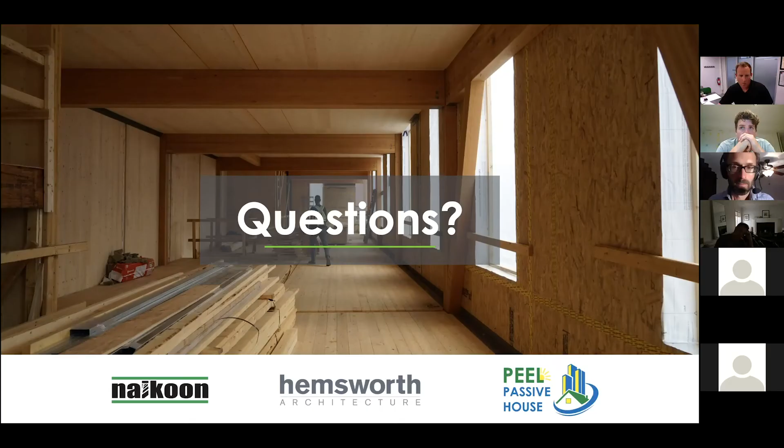It's about three minutes long, just recaps the whole process, and then I'm done. Let me find that. There you go. I'll play this one, and that'll be the end of my stuff here. Hopefully that works.